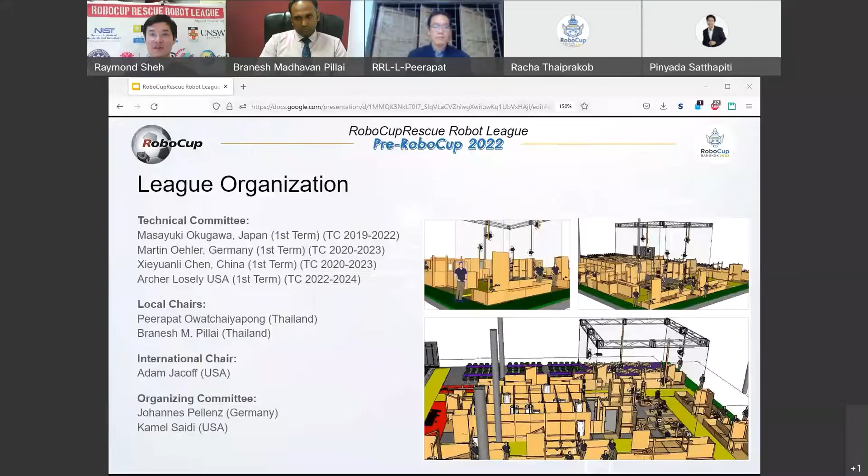So what is the League about? At the end of the day, we're talking about making sure that emergency responders have the tools they need in order to perform their extremely hazardous tasks in very complex environments, from safe standoff distances. What we don't want to have happen is the person who has to go downrange in a bomb suit to a known explosive to deal with it. We want this to be done with robots.

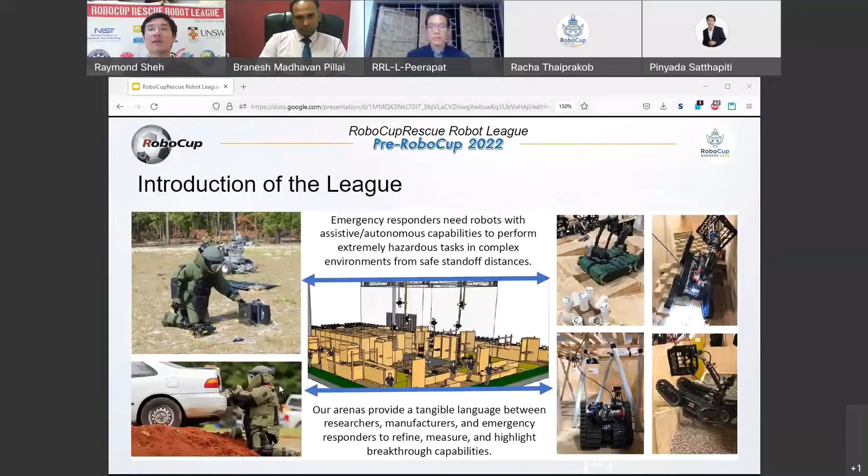And a very important part of being able to do this with robots is to provide a way of communicating the requirements and capabilities between researchers, manufacturers, and emergency responders, to refine, measure, and highlight breakthrough capabilities. So the RoboCup Rescue Robot League falls within a broader project called the Standard Test Methods for Response Robots project, based here at NIST, to generate the measurement science that allows these capabilities to be measured and communicated.

Standard test methods facilitate communication, and within the competition, responders and manufacturers learn about emerging technologies. The researchers and academics participating learn about operational needs and gaps in current capabilities. Local responders at every location where we run this competition get to keep the tests that make up the arena we build every year to develop their own test facilities.

For instance, the last year this ran in Sydney, half of the arena that was built went to the New South Wales Police Rescue Squad, who are using it not only to train their robot operators and test their robots, but also to test people who have to get into bomb suits. The other half went to an organization called EPE in Queensland, where they're building a whole test facility for academic, commercial, and military use to test the robots they need.

The League itself helps develop and validate standard test methods used worldwide by emergency responders, as part of the Standard Test Methods for Response Robots project, and also as part of ASTM Subcommittee E54 on Homeland Security Applications Response Robots. We test basic capabilities of mobility, dexterity, exploration, mapping, and through that, things like sensing and human factors.

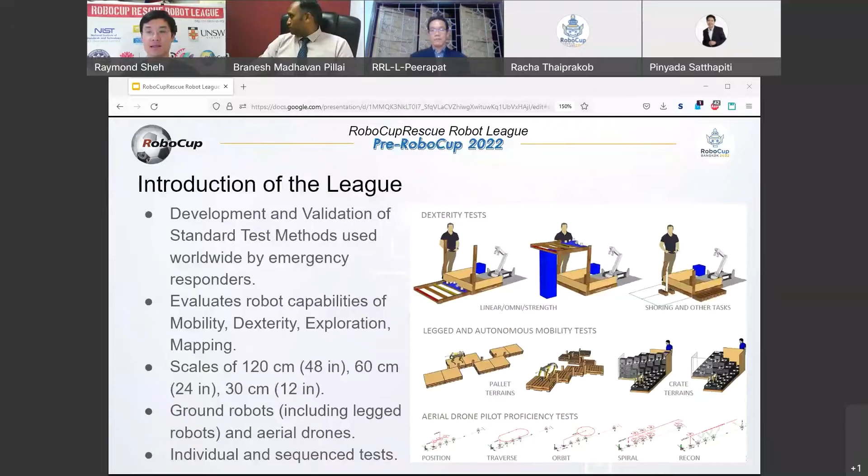The League is broken up into preliminary rounds consisting of the standard test methods performed individually. Teams select which tests to run, with scores normalized to the best performers in each test. The best performing teams qualify for the finals, where the tests are harder and sequenced. The championship award is given to the best performing team in the finals.

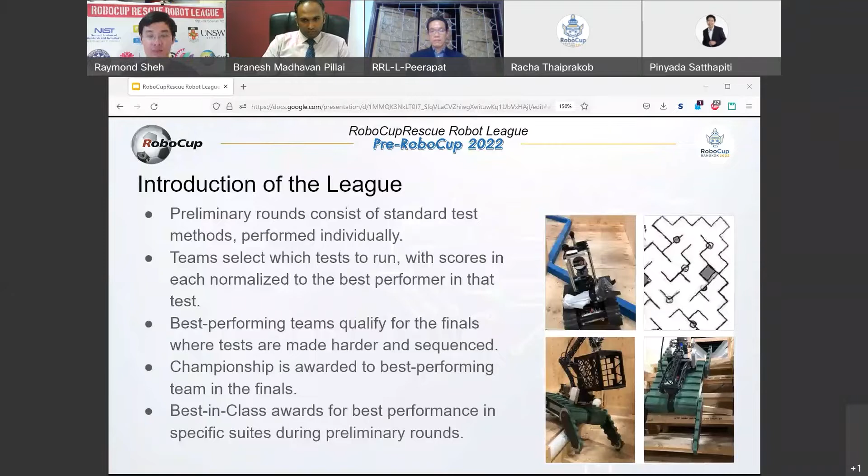However, we also have a large number of best-in-class awards for performance in specific groups or suites of tests during the preliminary rounds. This means we are not only encouraging the team that does the best and gets the award, but also teams that have developed specific capabilities we're interested in, even if they're not able to put together a team that wins the overall competition.

Every year, just on the major side—we'll talk about the juniors later—more than 300 trials are conducted in every competition.

During the preliminary rounds, the arena runs concurrently. In the year shown on this board, we had 6 teams running at the same time within this arena. This massive concurrency allows us to have statistically significant trials, even with a large number of teams.

The teams proctor and score each other to practice conducting tests themselves. They can choose what they focus on.

Now, the important thing here is that the robots can look quite similar. Success is often imitated, and there is often some kind of convergence to a particular form factor. Here it's very important to use standard test methods—these statistically significant measures of performance data—in order to identify where the differences are and what capabilities or differences should be replicated by everyone else.

This is a very open competition where everyone learns from each other. The use of standard test methods means that your performance and my performance can be specifically compared and related to the differences in our designs and implementations. This is how the state of the art pushes forward.

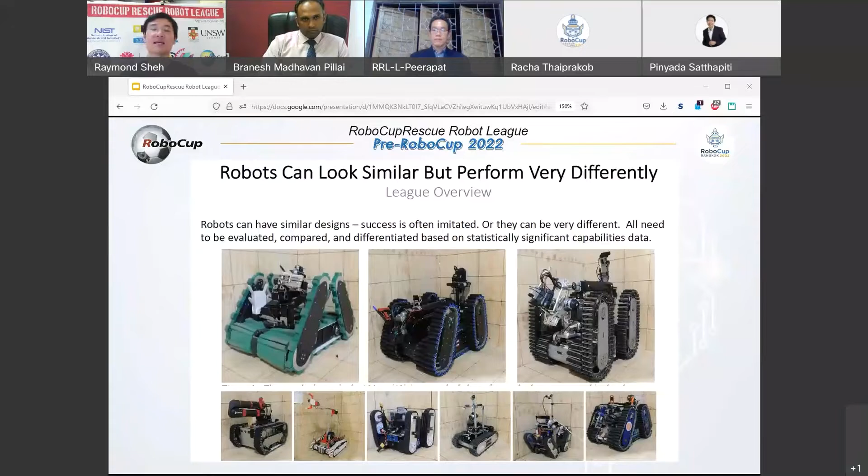Between the different suites of tests, we're able to compare robots designed for different purposes. We have radar charts that people may be familiar with, which show good performance in different parts of the problem. This highlights specific focuses in different areas, while the overall championship normalizes this to the best performing robot overall.

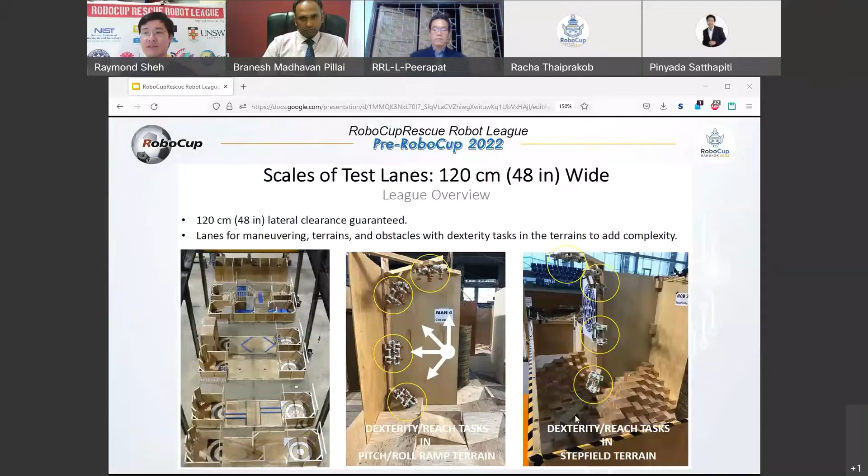So, talking about the scales of the environments in which we operate—this is the one we're all familiar with, the 120 centimeter scale: open areas, car parks, public buildings, where you have a fair bit of free space to operate in, even if that space has now been contaminated with rubble or the like.

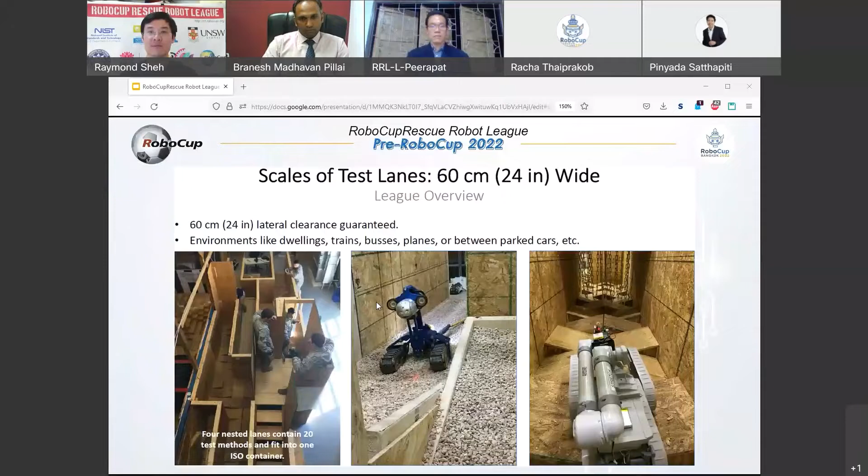The 60 centimeter scale now represents things like dwellings, public transportation, spaces between parked cars and the like. Note that this isn't a scaling down of the environment. This is still a full-size environment, but it's for smaller robots or large robots designed to go into small environments that need to now change their shape to deal with it.

And then we have the 30 centimeter scale. Some of you may know this as the Mini Arena or the Rapidly Manufactured Robot Challenge, the RMRC, which we'll talk about tomorrow at 8 p.m. Bangkok time. This now represents robots that must go into confined spaces, collapsed buildings, for instance.

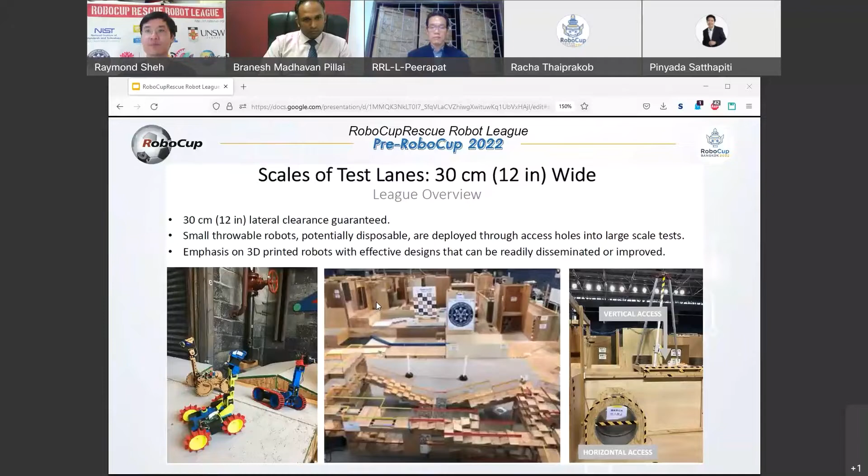The nice thing about this scale, even though it is still full size, it's full size in a smaller environment, is that now you can have the robots built using rapid prototyping techniques, 3D printing, laser cutting. And so this is the scale that we have been using as outreach into the high school teams to bring them into the real research challenges of the league. Again, we'll talk more about this tomorrow. We're also adding new terrains with a focus on legged mobility. And we'll talk more about that in a moment.

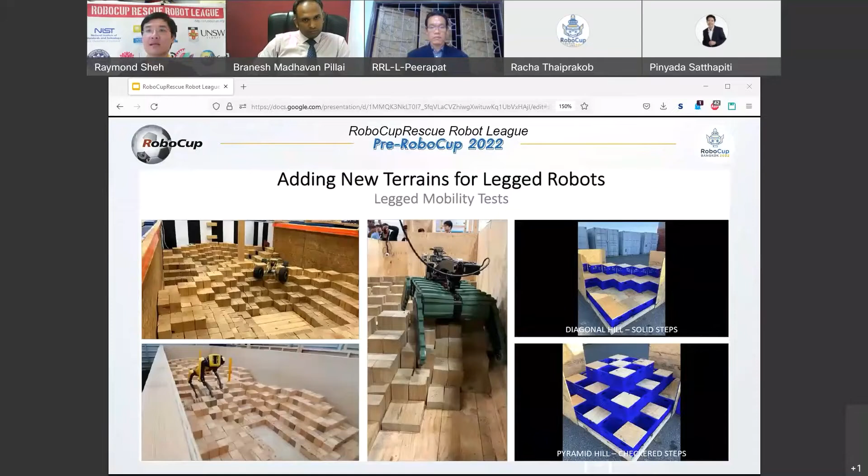Now we have some reality to deal with this year in terms of the rules and regulations. We know that while all of you would love to be in Thailand, some of you are not going to be able to. So we are having a combination of remote, online, and in-person competition. And the nice thing about using the standard test methods is that the individual tests that are common within the preliminary rounds are directly comparable between the remote facilities and the in-person RoboCup Championship. The remote teams will therefore be eligible for some of the best-in-class awards where they're directly comparable, but of course only the teams that travel to Thailand and compete in person are able to participate in the finals.

So how is the qualification process performed? First, the teams have to declare for the in-person competition their intent to participate. This is via the team participation form, which went out on the mailing list a little while ago and is due very soon at the end of this month. All this does is declare your intent to participate. It doesn't commit you to anything, and all we need here are some basic details about the name of your team, your institution, and who's in your team.

At the end of February, we will then require a team description paper to describe your entry. And this year, we will also have a requirement that there is a video. We'll talk about what that video is a little bit later. And there will be a Best TDP award. Regions where there are many teams, generally more than 5 teams, will be asked to also hold a local regional open from which the best teams, up to 5, will be selected.

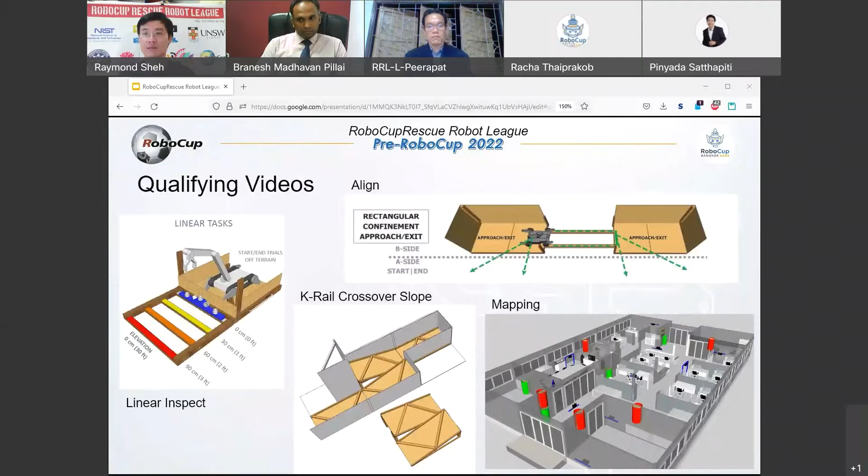The video that we expect is uncut video in this quad screen format, so we can see what the operator is seeing, what the operator is doing, as well as an overview and detail of what the robot is doing. The nice thing about these standard test methods is just based on this video, we can score the video and score the run. Again, we realize that at qualification, at TDP time, the performance is not going to be at the level that will be the final fielded robot. So this is just as a sanity check to verify that you're capable of putting these robots together.

The team description paper follows a specific format, which will be in the rulebook. But just some basic information, although there is also an award for teams that go beyond this and provide something that is also very useful to other teams.

So what are the overall test methods in the competition? And these are test methods for in-person competition. A subset of this will be what we use for the online competition, because of course we're not expecting everyone to build all of these in their own facility. So this year we have some changes. We have now maneuvering 0. These are maneuvering suites, which is sustained speed, just the basic sanity check of can you get downrange on a line. We have center, which has been updated to be simpler and more reasonable to robots of different aspect ratios. We have align, which has been made simpler.

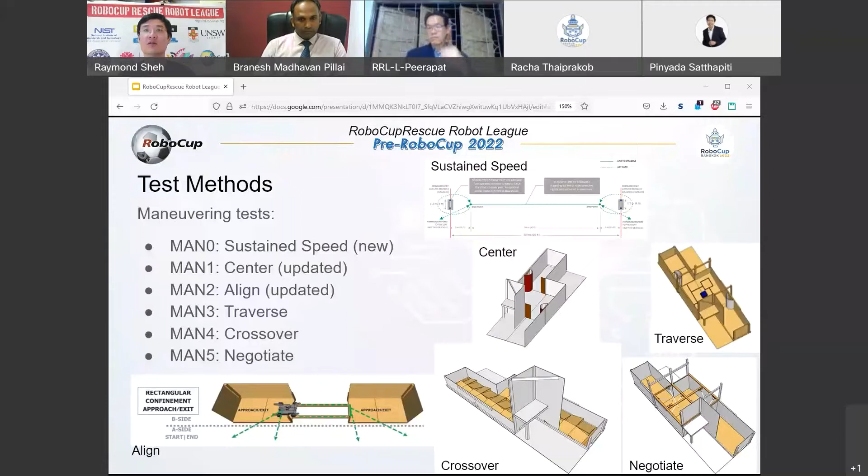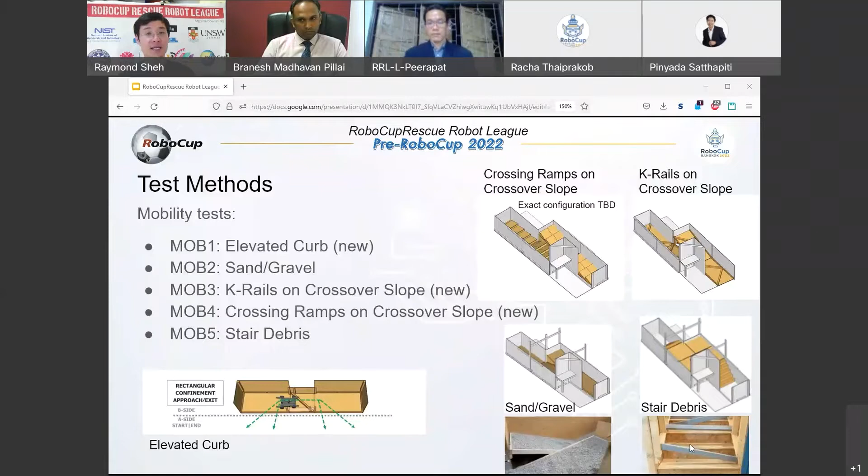And of course, we have the stair debris, which represents some of the challenges of response situations, such as what happened in Fukushima, where you had a stair that the robot needed to go up, but debris had fallen on the staircase.

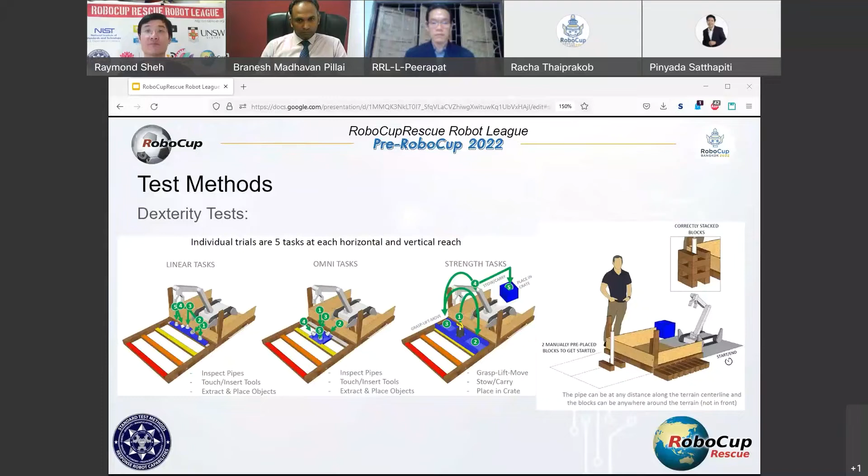We also have the dexterity tests. These are the tests that were run last year in a remote setting, but this is the way that they're going to be run in person now. We have the linear tasks, which are along a line, but at different angles. Omni tasks, which are around an object. Strength, which is lifting a weight in a controlled manner and pulling it out of the terrain, as well as shoring, which is using the robot to build a structure. And these are performed at different heights, different elevations, and so on. Here is a bit of video of some of these tests.

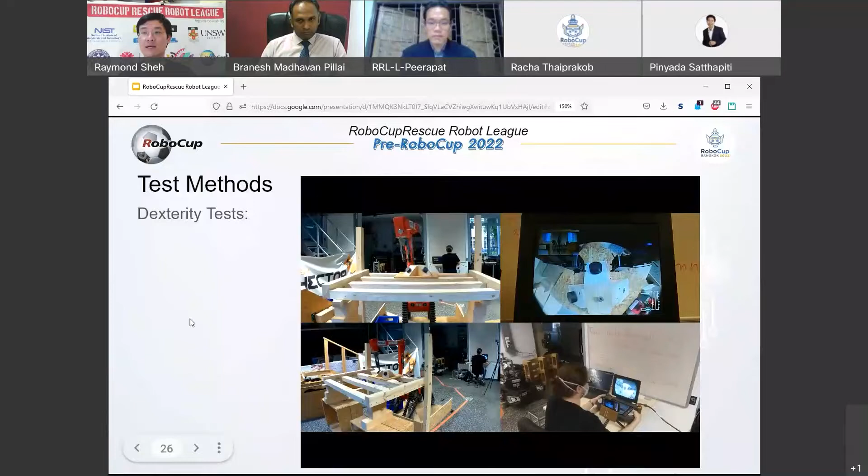In this case, this is Team Hector Darmstadt using a commercial robot. This is the Telemax, and they're performing the Omni extract. They're pulling objects out of this. This represents moving around an object in the space. In this case, demonstrating very nice coordinated control or inverse kinematics in order to pull those objects straight out so that they don't get jammed.

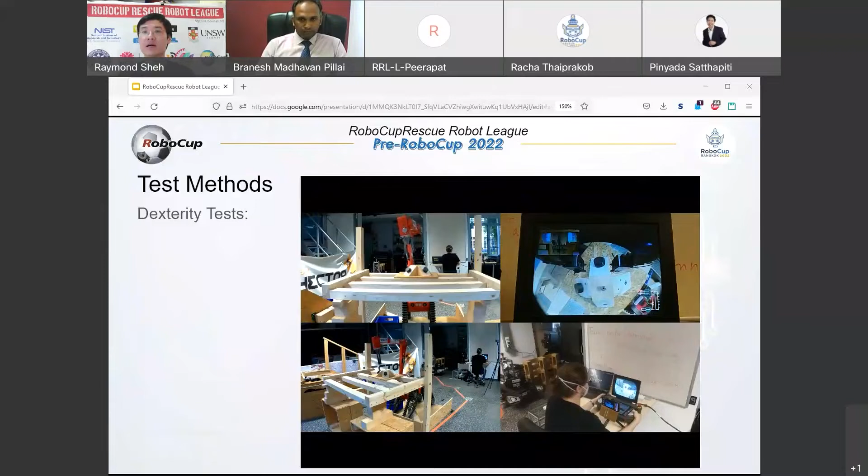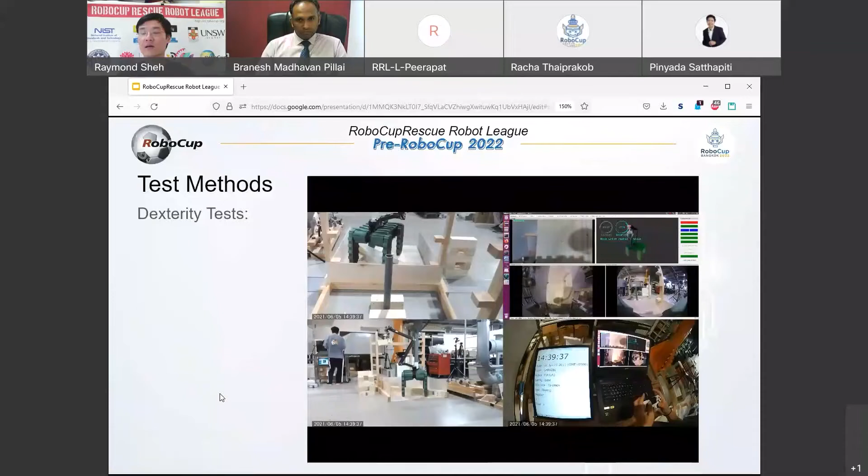We also have, here we go, in this case, an example for shoring. This is Team Shinobi, and they are building this structure. I'll fast forward it just a little bit. Okay. And this requires some level of precision and is made more difficult by the fact that there is a post in the middle of the apparatus that the robot shouldn't knock over.

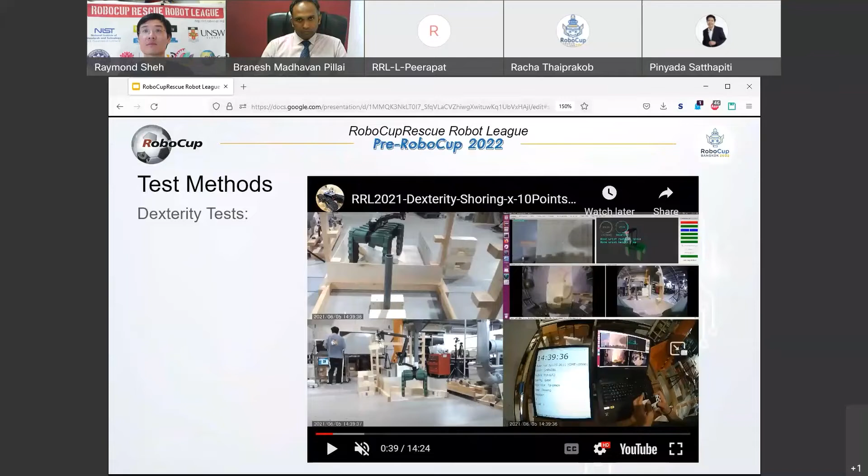We have some new tests as well here. This is the crate and pallet terrains for autonomous mobility and legged mobility. These terrains start off simple like this, but then they go up and they need to be overcome autonomously. This requires robots that can sense the terrain and either step over them if they're legged robots or reconfigure themselves if they're tracked vehicles with flippers and other variable geometries.

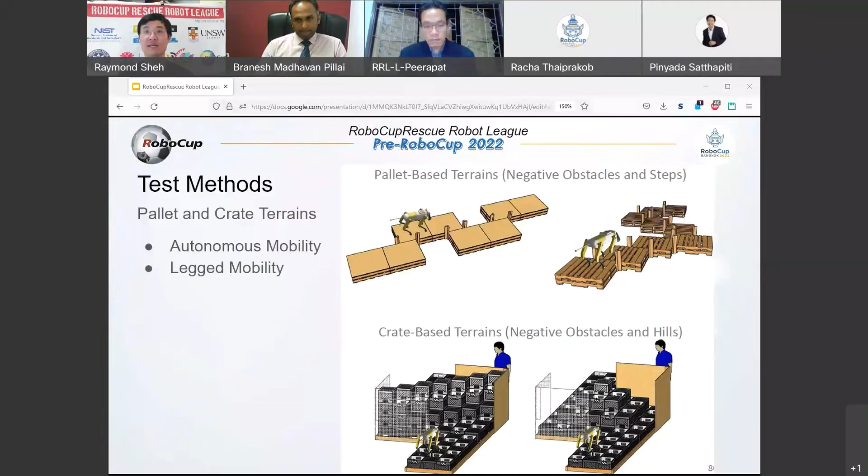We also have the crate-based terrains, which have very large negative obstacles. These crates, some are upside down, some are right way up. And so any vehicle traveling over them needs to be able to avoid the crates that are the right way up and present very significant negative obstacles. So here's a better picture of it, along with a robot that many of you may know, the Boston Dynamics Spot, picking its way through it and avoiding the holes.

And here's an example of Team Shinobi autonomously driving through the flat version. But of course, later on, they also then do autonomously the raised version as well.

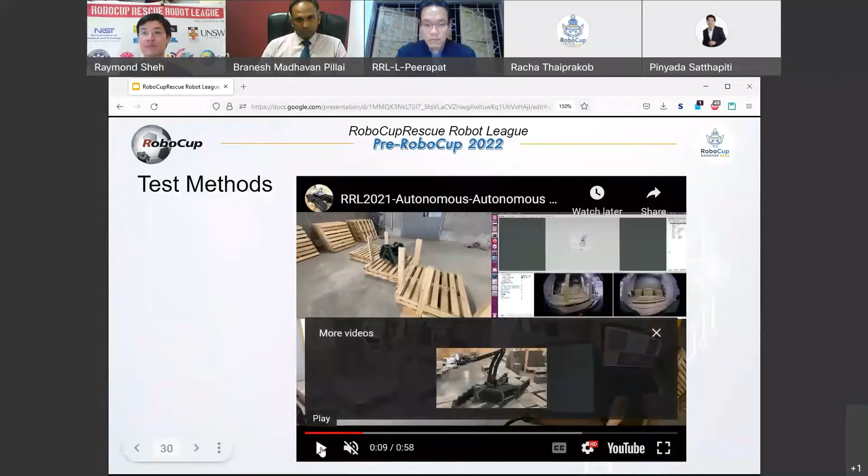For search and inspect, we have an environment in person. It is a standardized labyrinth. For the folks doing it in their own facilities, we provide guidelines for instrumenting your own natural environments with these standard test methods. These are standard pails for inspect objects, each with a different identifier and an eye chart. There is an open one, which is very easy to see.

We have a directed inspection, which means you have to be lined up with the bucket in order to see it. And then we have one with a hole in it, where in order to see the target properly, and that is to see the entire colored ring, you need to actually be in a specific location in front of the bucket. This forces you into specific locations in the environment and tests your ability to deploy your sensors specifically where they need to go.

For mapping, we also have these half-round fiducials. We often use concrete forms to build these, but you can also build these out of any number of other materials. And you'll notice that they hang on two sides of walls. The idea is that if you map one side, you get half of the fiducial, and then when you go around and eventually get to the other side, you see the other half.

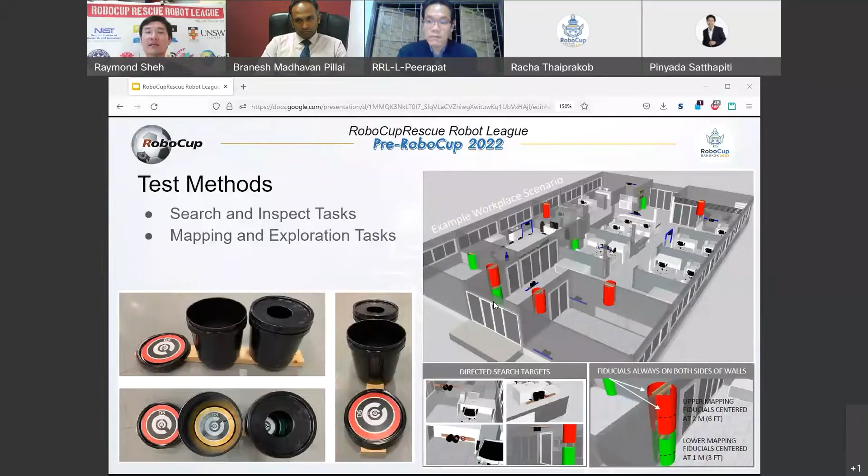And if the two halves match up, that means your map has maintained its shape all the way around. You haven't lost your localization. Whereas if they get displaced, it means that your localization and map has broken a little bit.

So here's an example of a natural environment for mapping. We're going to go through this fairly quickly. There's also uneven terrain that the robot has to drive over while it's doing its mapping.

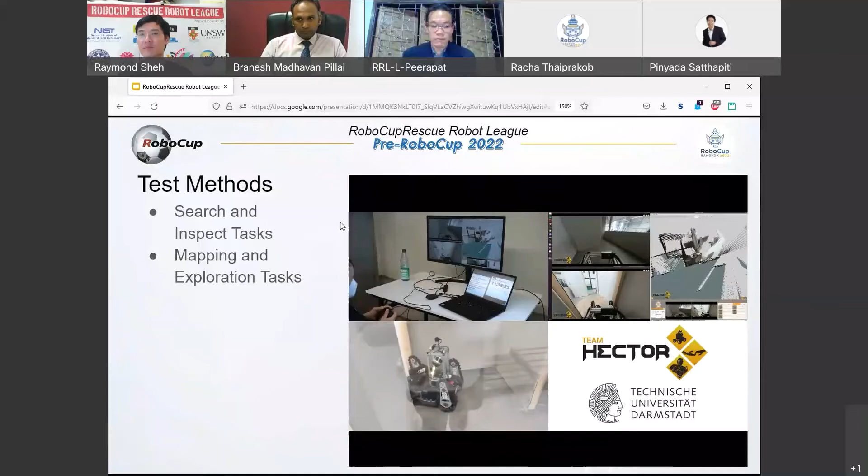And we also have, in this case, this is inspection. You can see where the pail has been placed as an object of interest in the environment, and the robot needs to drive up to it and use this manipulator to get close to it and inspect the different targets.

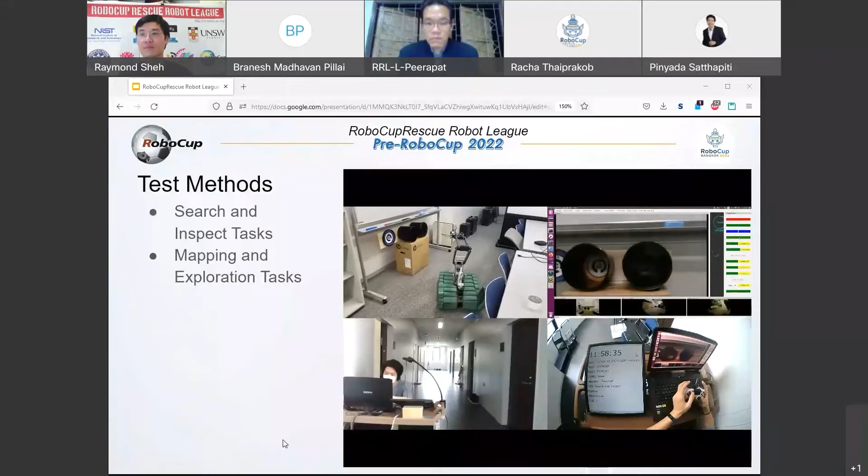As you can see, you can't see into the one on the far right until you get close, whereas the ones on the left and in the middle are significantly easier and test your different abilities to direct perception.

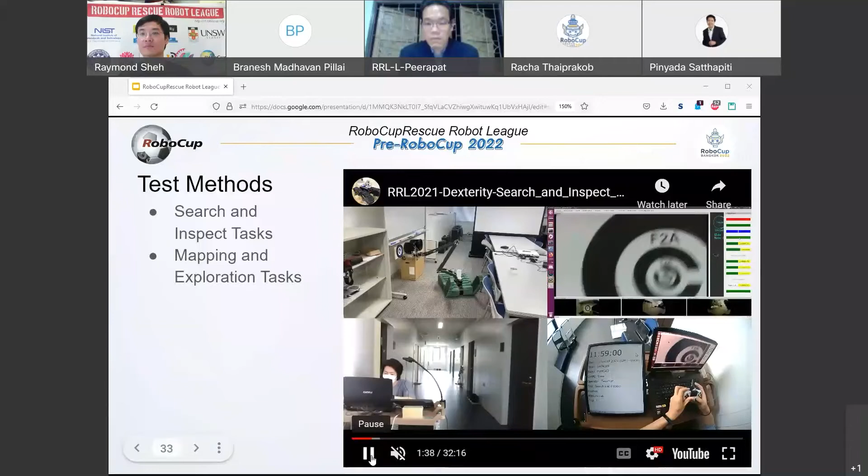Okay, so competition logistics, how do we organize this? So in the in-person competition, in preliminary rounds, each day is divided into 30-minute synchronous time slots. This is how the competition stays in time. Everyone shifts on the same clock. Every day, teams take turns selecting which time slot and test to run. So for every time slot, every test is available, with at most a certain number depending on how many people we have to judge and referee.

At the end of the preliminaries, for every test, the scores are normalized to 100 points. This is how we compare the easy and the hard tests on the same yardstick. A very hard test, even if only one team is able to do it, they have some performance, they get 100 points. Whereas for an easier test, to get the 100 points, you have to be the best. You have to be the best in both cases. And the best total in each suite is awarded the Best in Class award.

In the preliminary rounds, at a prescribed point in the run, the readiness test is performed. This tests the performance of the sensors and manipulator that the robot would need downrange once it had gotten over the terrain that the test methods are designed to test. So this proves to the competition that, for instance, once you're partway over the terrain, you haven't broken your sensors and the manipulator is still working.

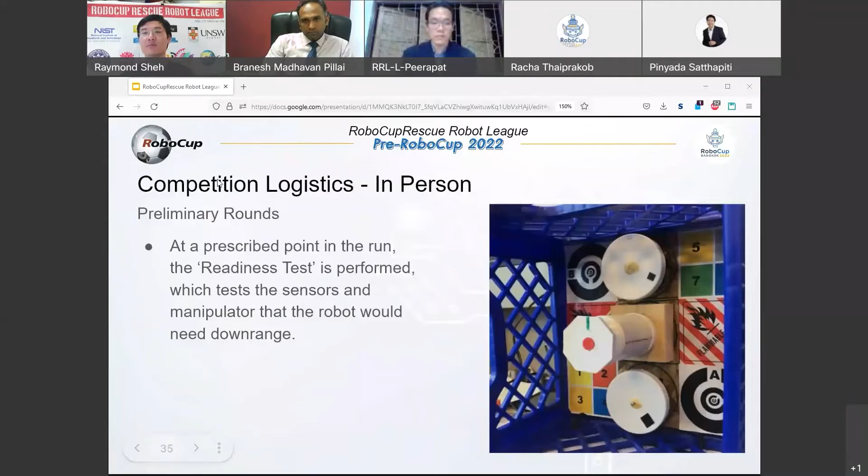For the final rounds, the test methods are grouped into operationally relevant sequences that are performed one after the other. The readiness test is performed at various locations in the sequence, representing victims that you might find or objects of interest that you might see as you're going through an environment. And there are various manipulation tasks that are also performed. In this example here, it's carrying a crate through the hurdle, which is actually an old test that's not in this year. But we can also have robots placing objects or turning valves or the like.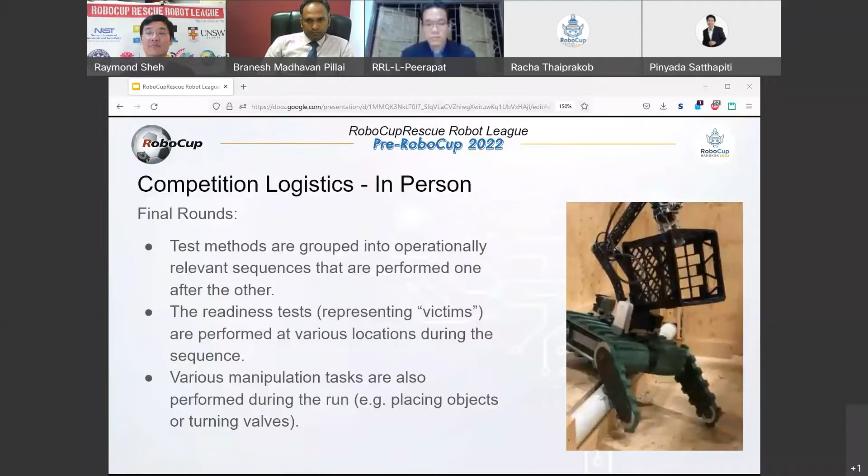For the remote online competition, we do this using uncut quad screen video uploaded to a public timestamped video sharing site such as YouTube, with the team scoring their own run. Now, the teams only upload their best run for each test and setting that they wish to declare performance in. By doing this publicly, everyone else can then attest to the scores. You can check each other's scores randomly and make sure that there haven't been any mistakes.

The scores are normalized as before, and the top teams, assuming they've also submitted a team description paper, then progress to the Best in Class remote finals. Now, we can't directly compare these, of course, because these preliminaries remotely are done with the teams selecting their best run.

So the Best in Class remote finals are performed live on a video conference with judges and the public just prior to RoboCup week. And where relevant, for instance, in the mapping or in the search and inspect task, the judges can request last-minute changes, such as moving the fiducials around, just to make sure that the maps and the performance are reflecting what is happening currently and not based on some pre-recorded policy.

And the resulting performance in the common tests, as mentioned, are directly comparable to the in-person best-in-class runs. But of course, the ones who are doing this remotely aren't going to be eligible for the championship awards.

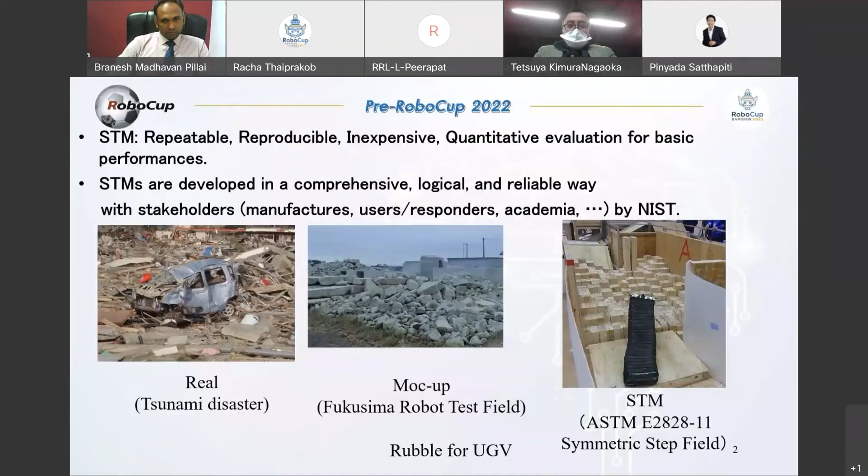From the viewpoint of user or responder. Today in my talk I introduced some useful keywords, and one of these is the InterAgency Board. Number is 03OE-07 robot. This InterAgency Board is a group of responders who give advice on what responders should do.

And in this standard, they said many responder organizations evaluate robots thoroughly on the promised capability of manufacturers. However, comprehensive evaluation of such marketing data is extremely difficult due to differences in manufacturers' terminology and test methods. Standard test methods such as the STM series can be used to provide objective and reliable data on robot capabilities.

Responders can trust the data captured at any participating accredited test facility, no matter when or where the test was conducted. No matter when or where, if they are accredited. So if your facility in Thailand is accredited, that data can be used all over the world.

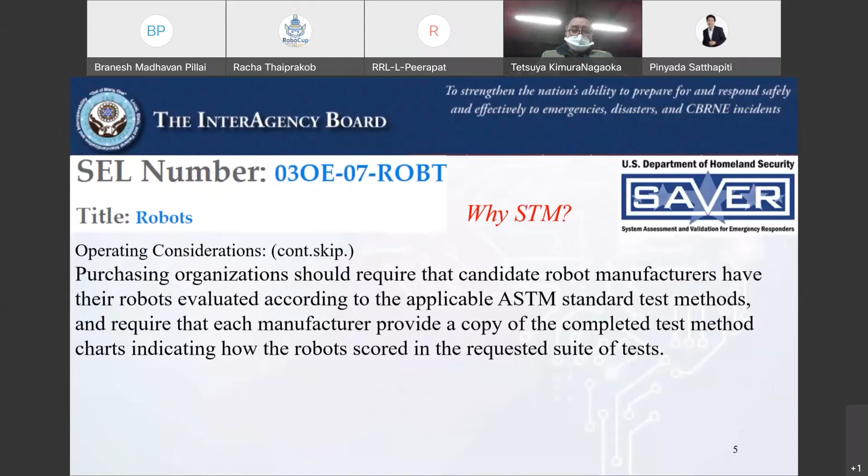This is a very good summary of why STM is important. And to develop that, in the US, Adam's group, and in Japan, my group, were both awarded in 2020. It's a government view of such STM development.

Also, an important letter we got is from an EOD staff. Raymond, were you at that site when we got this letter? Do you remember that? I remember that, yes.

Yes. So at the end of the ASTM meeting, a guy visited our meeting room and handed this letter to Adam. First, I thought, oh, our meeting time is over, so we should hurry out and clean this room. No, this letter was from an EOD staff.

It says, ladies and gentlemen, thank you. What you design and build has saved my life on hazardous occasions and the lives of countless sailors and soldiers. I think I can speak for all of us when I say you are doing a great service for EOD teams around the world. So again, thank you very much. I hope you have enjoyed your stay here in Indianapolis. Taylor R, Navy EOD Mobile Unit 2.

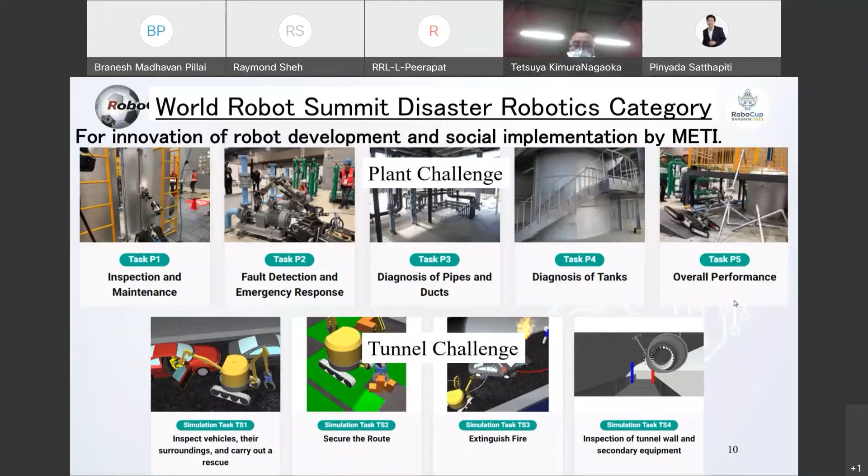The first one is the plant challenge. We have 5 tasks for plant inspection. And the tunnel challenge, it's a simulation, with 4 tasks for tunnel accident, car accident, and also tunnel inspection.

And the last challenge is the STM challenge. It's a Japanese version of STM for plant and infrastructure inspection. This is a Japanese government order to develop such STM, they need this. And these STMs are complementary to the current NIST test method. The current NIST standard test method originated for urban search and rescue and EOD. So this Japanese standard test method can be complementary to cover all the applications of response robots.

So I think for RoboCup 2022, many Thai people will join. So if you can develop your own STM to accelerate your own application, yes, it's good. And we can change ideas and cover and extend our application of the response robot. That's all, thank you very much.